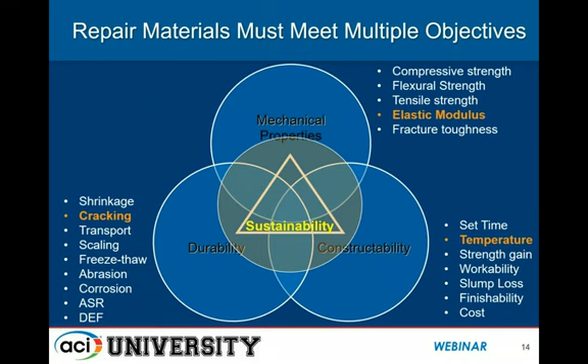But under durability, you see I have highlighted cracking there, so that's one of the aspects that I will focus on. And under mechanical properties, I've highlighted elastic modulus. The reasoning is there's a movement now towards specifying things like elastic modulus instead of compressive strength. I want to touch on that a little bit and some reasons why that may be good or may not be so good depending on the application. So I think that's important as well.

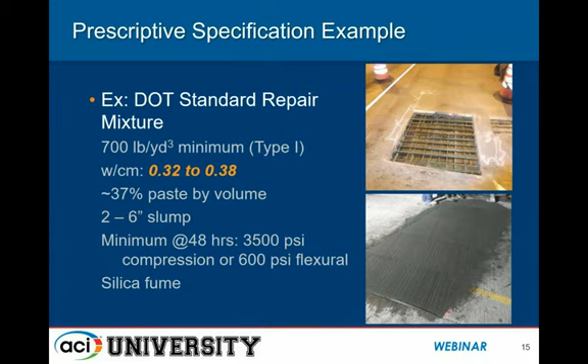What has driven this work and what I think is critical to the development of a performance-based spec is that we have existing prescriptive specs, and in many states you have DOTs, for example, that utilize standard repair mixtures, and what you'll find is they're often significantly over-designed for strength, mainly because we're focused on early opening strength and trying to ensure that the opening happens within a very tight time frame, which is usually a consideration that affects traffic and safety. We really don't want to take any risks with having an opening be delayed. So on a prescriptive basis, the mixtures are often significantly over-designed because the focus is really on that early opening.

What often comes out of that is then a lack of durability — we have significant cracking issues. So what was done, particularly in the Illinois Tollway, they wanted to identify mixtures that would give us the opening strength that was necessary without having to prescribe the exact mixture, but then also using a few techniques to try to mitigate cracking, also give us some long-term durability enhancements.

So what was investigated there was a calcium aluminate-based product. Calcium aluminate cement has been around for quite some time — it actually dates back to the 1800s, so it's not a new product. But what happened in the early part of the 20th century was that it was discovered that this cement had a drawback where the strength would diminish over time, a process called conversion. This conversion process meant that if we built structures out of calcium aluminate cement, it could potentially have a strength diminishing behavior, which could then lead to the risk of collapse over time. Because it was unpredictable and difficult to design for, calcium aluminate cements were basically not allowed after that for structural applications.

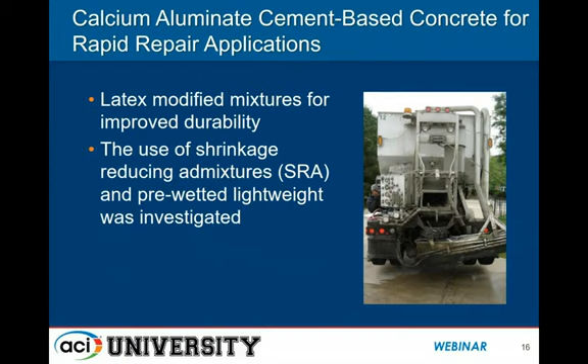But in this case, it was a highly specialized application. And you can see in the picture on the right-hand side, we're dealing with mobile concrete mixing, mobile batching systems, and that adds another element that can sometimes be a challenge. We have limitations to how many materials we can use, and how much of a given material we can carry. So we have to consider that before employing the mixture strategy as well.

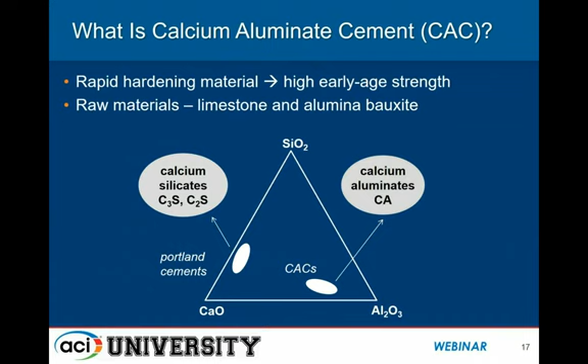So what is a calcium aluminate cement? Well, these are different chemistries from traditional Portland cements, illustrated here in this ternary phase diagram. I'm sure all of you are thrilled you got to see a ternary phase diagram today. I know I am. What we have is the balance between lime, silica, and aluminate. We basically have the CAC system shifted much more towards the aluminate side, hence the terminology calcium aluminate cement. The raw materials utilized in CACs are limestone and alumina bauxite. So we have different raw materials, different cement chemistry, and very different performance with these products.

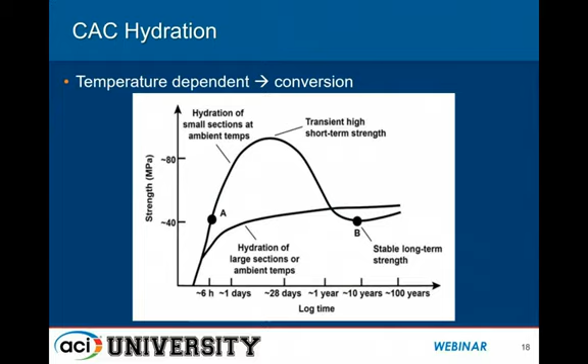But when we're talking about concrete repair, we set out to investigate this material, and understanding that strength really wasn't our concern, what was ultimately done here was we investigated these two different types of temperature histories for how they affected durability. I think that's really the critical thing here, that the durability properties were studied closely, and we wanted to ensure that it wasn't just strength that we were after for that early opening time.

If you haven't worked with CACs before, they're impressive from that aspect - you can get that early strength and then reliably get it. It comes in no matter what your early temperatures are. We found that in a lot of cases, the early temperature was not as significant.

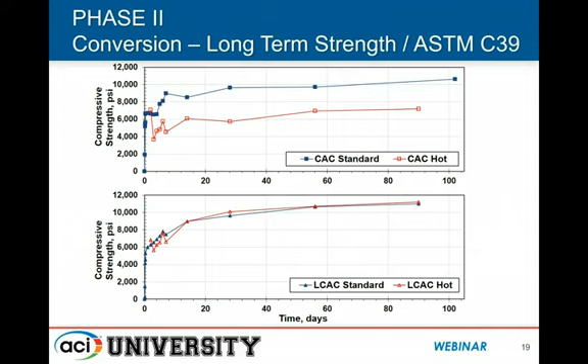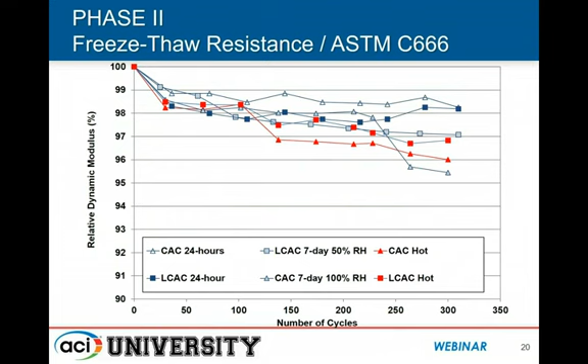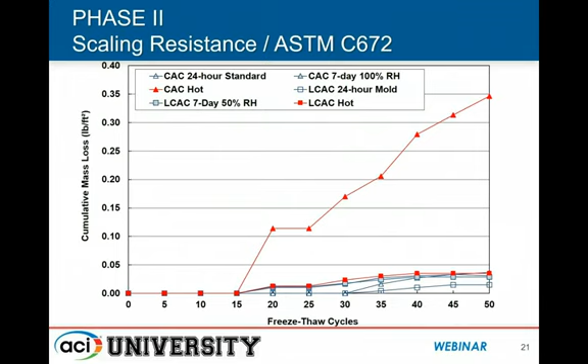What happened, though, is when we started to add the latex, we began to discover that it gave us great freeze-thaw durability. As you can see here, we had well over 300 cycles, and the relative dynamic modulus we were seeing in the sample very significantly outperformed some of the other materials we had previously investigated. But we began to see that there was some scaling resistance issue with the material when it was not utilized with the latex. So this is where the latex came in as a significant improvement from the durability side.

And then when we examined shrinkage and overall volume change behavior, we didn't really see a whole lot of improvement. So what was interesting here is, you know, we were achieving the durability, as I said, with scaling resistance, but not necessarily the shrinkage resistance that we wanted.

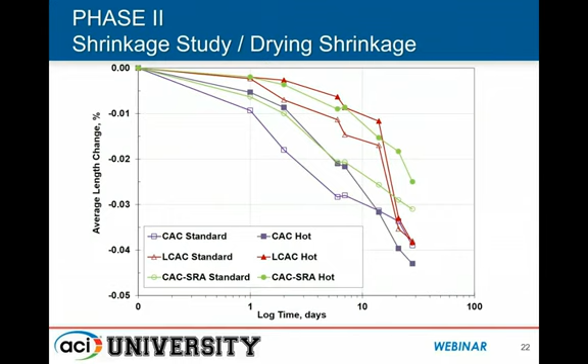So we started to move towards a different type of testing. What we wanted essentially for these patching systems was concrete mixtures that didn't crack. We began to employ a new test method that's been around for about 15 years or so, but some of you may not be aware that it's out there. It's called the restrained shrinkage ring test.

This test allows us to cast a concrete donut around a steel pipe for restraint. As the steel pipe pushes back on the concrete as it tries to shrink, you develop tensile stresses, and you eventually see cracking in most concretes. If this cracking happens within the first week or so, we consider this to be a potential risk, and in particular with patching materials, we want the cracking to happen sometime after the first week after the sample has been cast.

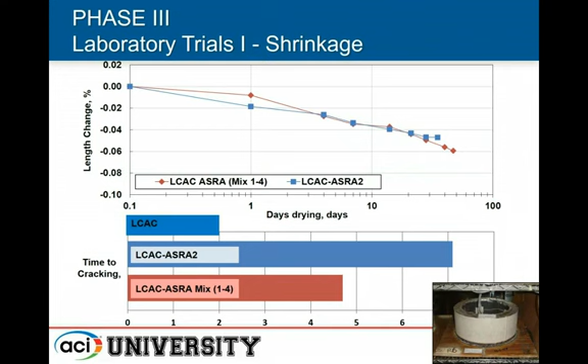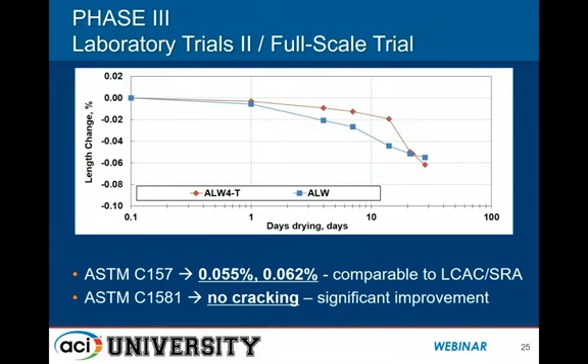But we did see a tremendous improvement in crack resistance. We had no cracking at all in these rings. They went out past 28 days, which in the ring test is considered essentially the gold standard. Remember, just two slides ago, I showed you that these concrete mixtures without the lightweight material were cracking within about a week or so. So with some addition of saturated lightweight aggregate, we've eliminated cracking in the restraint ring. This is a very significant improvement and something I heavily emphasize as a strategy that works with this material.

As I said, it did throw us off a little bit with respect to the early strength, and that's something you have to design for, but I believe it can be accommodated.

So this is what we ultimately wound up with: a hybrid specification. It wasn't purely performance-based. We wound up using the saturated lightweight and no cracking in the ring test for at least 14 days—that was our target. And then finally, we upped the final cementitious materials content to address some of the sensitivity we saw with strength.

So I think the conjunction—using the latex in conjunction with the CAC—allowed us to get the scaling and freeze-thaw durability, and then using the saturated lightweight for internal curing gave us the crack resistance. So this is, I believe, a successful program, and right now we're working on ways to implement it in the field.

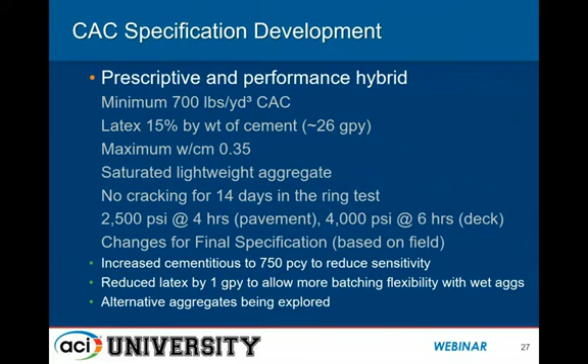Some of the comments I have in terms of making the specs successful: you really have to ensure that the producer and the field teams take ownership of the concrete, and that field control is kept very tight on the aggregate moisture and the batching program.

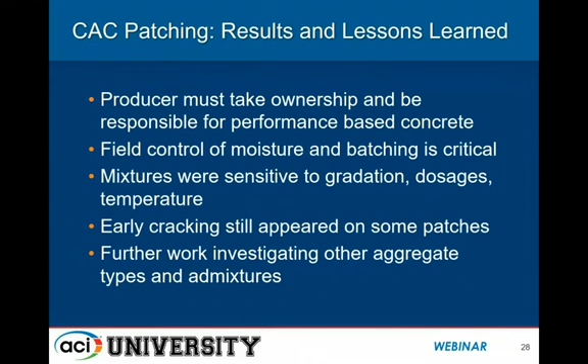The mixtures, as I said, had some sensitivity in early strength to the presence of moisture in the aggregate, and also the gradation and admixture dosages. So these are things that need to be watched for, and as we continue investigating in the field, particularly in the Illinois Tollway system, I think we're going to continue to see improvements there.

Moving on to Portland cement patching, this is work done in conjunction with the Illinois Tollway, trying to address the cracks occurring with the prescriptive repairs. What we ventured into was optimized concrete mixtures that utilize the ring shrinkage test so we can prevent the cementitious content from becoming excessive.

We're trying to get the strength we need, but not over-design significantly for that early strength. Some of you may be thinking, doesn't that add a little bit of additional risk in terms of making our strength? And yes, I agree with that.

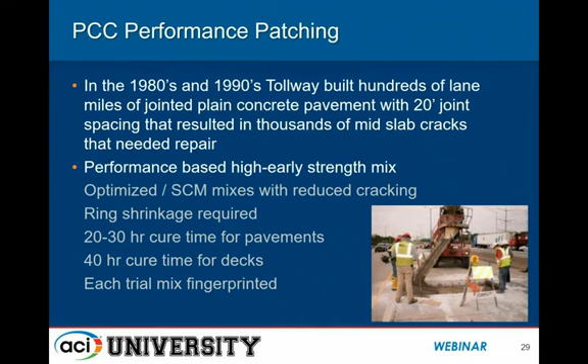There are some additional things you need to watch for during the trial batching process. You especially need to make sure your admixture dosages are dialed in, and as outside temperatures change, that you have the relationship between early strength and accelerator dosage figured out, so you're not relying purely on the cement to get your early strength, because I think that's where folks run into trouble with cracking.

What we often see with some of these mixtures is that the length change testing does indicate a problem here. The early age length change is higher than we want it to be, and the strengths were nearly double what was needed in some cases with the prescriptive mixes, so no emphasis at all given on durability.

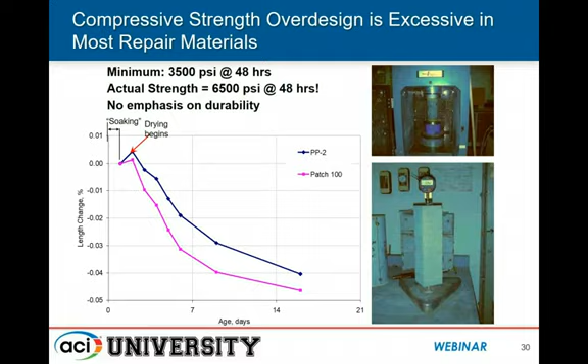We wanted to get away from that because, again, the ring shrinkage test is available. It allows engineers to develop specifications that prevent cracking problems.

To give you a little more feel for this test, again, it's this concrete donut. We instrument the inside of the steel pipe with strain gauges and monitor the strains on a computer, and that tells us when the cracks are going to occur.

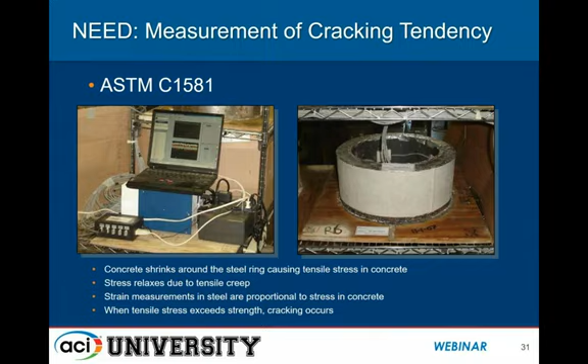It also allows us to compute and monitor the stresses in the concrete over time and get a rough idea of how quickly the tensile stresses develop. I think this is a critical test that gives us a lot of insight into what types of concretes are beneficial from a cracking standpoint.

There are plenty of situations when strength is most important—for construction sequencing, form stripping, moving to the next level in a high-rise structure, where compressive strength dominates early behavior, and that's really what you want. But in the cases I'm discussing today, patching, paving materials, and bridge decks, it's not compressive strength that drives us. It should be the cracking behavior, and we need to accommodate that to a greater extent.

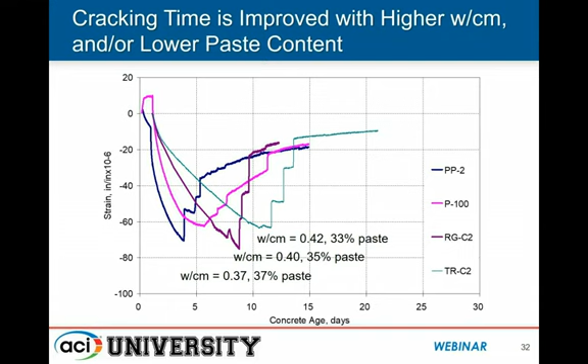This is a mixture that still gets 4,000 PSI at 48 hours, so it meets the requirements of the tollway patching system. With a little healthy dose of accelerator, there were never any issues getting the strength in this mixture. Instead of relying on the cement to do this job, we're veering more towards accelerator dosage and trying to reduce the amount of cement in the system, and we're seeing great benefit from that.

So here's where we wound up revising the performance requirements, and this is a purely performance-based specification. We have opening to traffic strength and acceptance for payment strength at 14 days, and these are the two strength criteria that were emphasized.

Once you get the opening to traffic strength, really there was no concern regarding getting the later age strength. I don't think we ever had any issue getting that in less than a few days, but you'll notice it's not really required until 14 days. The time to cracking minimum for a patching material in this system is considered 10 days, so we have basically the bare minimum needed to make a small patch in a deck or pavement and not see cracks.

With respect to freeze-thaw, we have a performance test requirement there, and also for drying shrinkage, and these are more for our long-term durability, so we're trying to emphasize that as well. Chloride penetrability was also specified, but this is also for long-term durability, and it also allows us to get a sense for how the long-term corrosion behavior is going to potentially affect us.

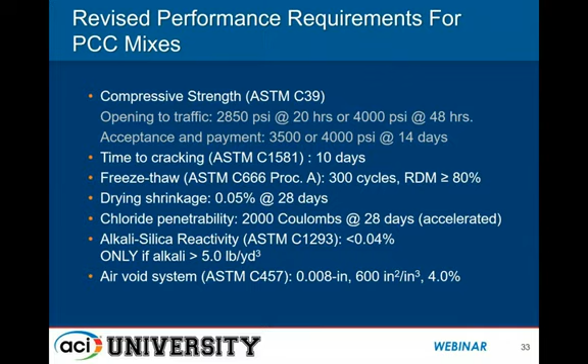How do we expect the industry to respond to this spec and meet these requirements? Well, I think shrinkage mitigation is the key, and a lot of different strategies will work, but the top strategies I have seen utilized are shrinkage reducing admixtures and saturated pre-wetted lightweight aggregate. In addition, we're seeing a lot of producers now veering towards optimization of their aggregates and incorporating a mid-size coarse aggregate to try to minimize void space, and utilizing higher percentages of SCM, which we've also seen provide a lot of positive benefit in reducing autogenous shrinkage and helping with the cracking issue.

And finally, I'd like to mention a relatively new idea that's out there gaining traction in the industry, which is a superabsorbent polymer that can also be used for internal curing. This doesn't have as much history in the construction world, but these materials have been around for many, many years. In fact, those of you in the audience that may have kids, this is the material that's in a diaper. So if you have a spare clean diaper laying around at home and you shake the powder out of the middle of it, that's a superabsorbent polymer.

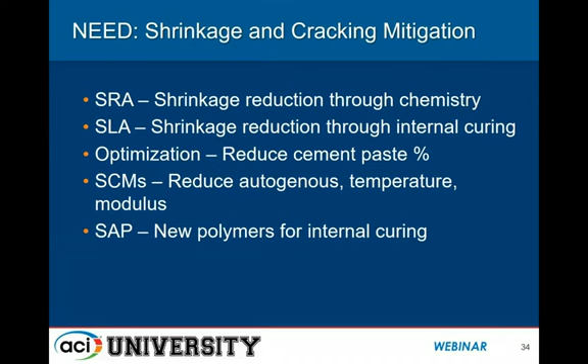We are investigating, and there are other groups as well investigating the use of these polymers in concrete and some of the benefits they provide. So really kind of a cool technology. I'm hoping to be able to talk to you more about that in the future. What do these strategies do for new construction?

For a bridge deck, one of the things we're seeing across the board in minimization of cementitious content and employing shrinkage mitigation is a characteristic drop in elastic modulus. If you're a structural engineer, this may sound like a bad thing, since a lower elastic modulus generally means higher deflections. But for a newly constructed bridge deck, we want a lower elastic modulus, because that tells me the stresses due to restrained shrinkage are diminished. So this is a good thing.

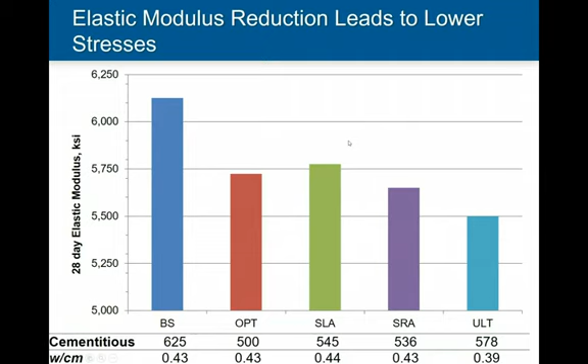We think this is in part due to the mitigation techniques—some of these lightweight aggregates and admixtures might be doing some of this—but it's also optimization of aggregates and using the right amount of cement paste that can have this benefit. So we're seeing this relationship that we think is a potential win from a new construction standpoint.

Another point to make is we are still tracking drying shrinkage. The linear drying shrinkage, I think, does have a lot of benefit as a performance parameter for long-term drying cracking or drying shrinkage cracking. But I really do believe, as I said previously, that the ring test is the one where we will see the most benefit.

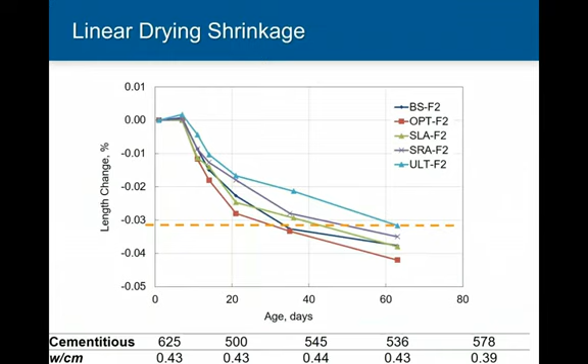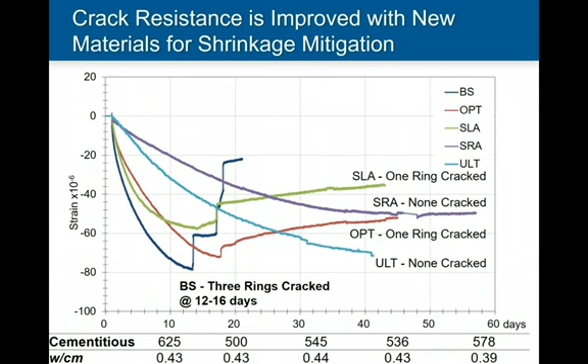Both of those were situations where only one of the three rings cracked. So we're kind of right on the cusp of cracks starting to become an issue, but it was out past the 10, 14-day mark. We were really pleased with that compared to the control mix, which had all three rings cracking right around the 2-week mark. So again, a very significant improvement.

How do we incorporate this into specifications, you might ask? This is where the rubber meets the road. We want to write specifications that are constructible, that give the contractor tools to be successful, and employ concrete mixtures that allow the concrete suppliers to be innovative.

One of the first things we did was incorporate an upper strength limit in the specification. This wasn't a popular idea to start with, but if you look carefully at the equation at the top, the minimum required by design was 4,000. If you submitted a trial in the qualification process, you were getting 6,000 PSI at 14 days. That meant your allowance for the trial was going to be 6,000 plus 1,500, giving you a range of 4,000 to 7,500 when you get out into the field—and that gave enough wiggle room.

In many cases, we haven't had issues with this, and it's been no problem at all. The slump loss was considered as well—another constructability issue that was emphasized, trying to make sure that none of the strategies employed caused a problem on the construction side.

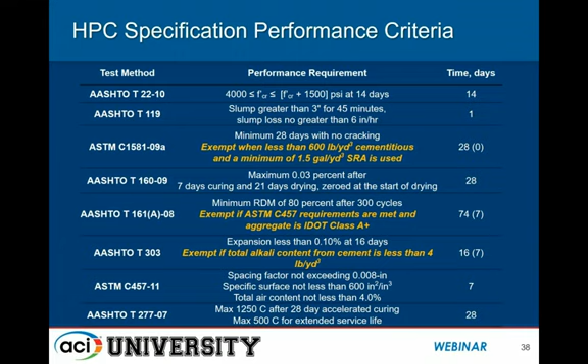We tried to focus on minimizing these timeframes to the point where all of the testing could be completed in a 28-day period. We think that was accomplished, and so far it has been fairly successful in making the testing program work for everyone.

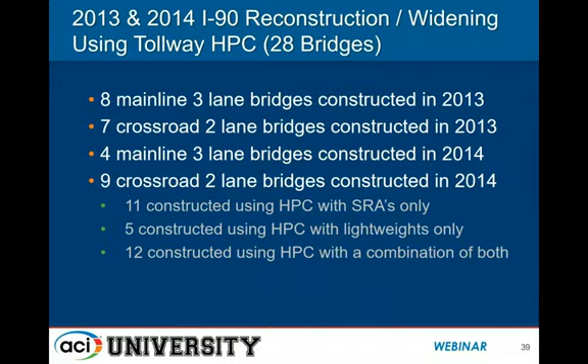Finally, the field performance was considered by the Illinois Tollway to be outstanding. The feedback I got, from a few years ago, is that not a single crack was found on the newly constructed Jane Addams Tollway, I-90, that goes through Chicago. And further improvements are currently being investigated.

We're in the process of finalizing a report where now the life expectancy of the high performance concrete is being pushed out to 75 years from the previous 50-year life. This involves looking not only at the rapid chloride penetrability test, but also new test methods for resistivity and formation factor. If you aren't familiar with resistivity and formation factor and want more information, feel free to email me.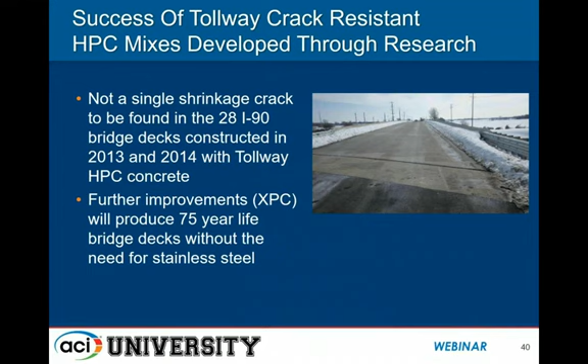Those are new methods that are quicker and easier to run than the traditional rapid chloride test, but give us basically some of the same information, and can be used as well in modeling and prediction of service life. So really some pretty cool trends coming out of that program.

Finally, I want to conclude with some discussion of overall performance-engineered mixture benefits. The primary benefit for concrete producers in the audience is that this allows you to innovate. It allows you to seek out the strategies you prefer, which may be the best combination for your materials, or perhaps the best cost option, giving you the freedom to select the approach that works best. It encourages the optimal usage of cementitious material, which I think is a big key to durability.

It also encourages uniform gradation, or optimization of aggregates, which is becoming more and more of a trend lately. Some other folks working on this, like Tyler Ley at Oklahoma State, have developed the tarantula curve that you may have seen. I think this is really the direction things are going to go in our industry—careful selection and utilization of uniformly graded aggregates is the key.

Finally, to conclude, field performance is showing that these new directions and strategies are providing the desired improvements, and we're seeing an increase in service life because of how much crack mitigation is being witnessed. I'm hoping all of you in the audience have found some things in this presentation helpful and that you'll get to employ some of this in your own work.

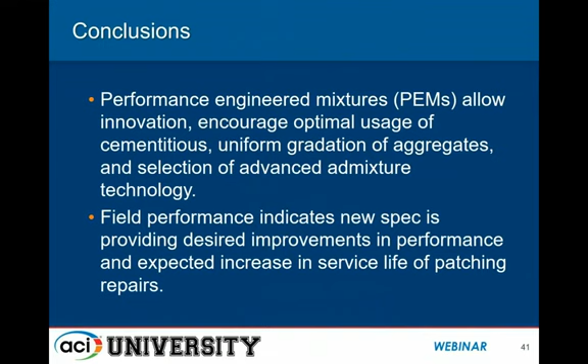If any of you have any questions or comments at this time, I'd like to take those.